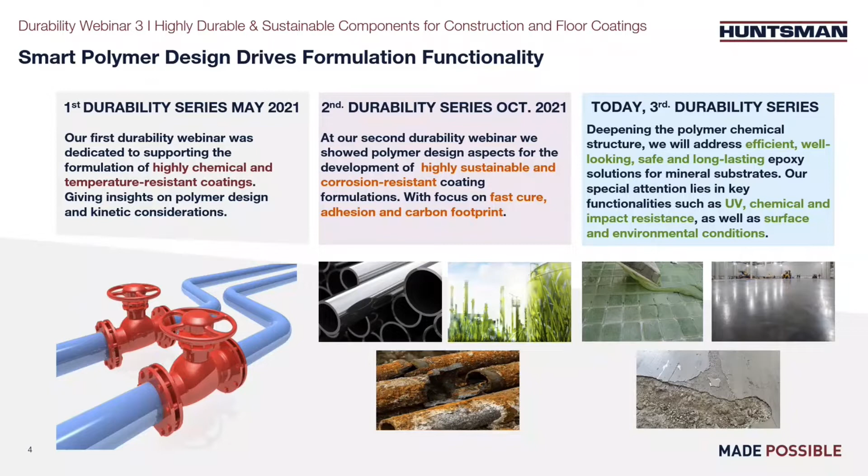Today, and following the specificities of the polymer chemical structure, we will address key infrastructure challenges like low emissions, UV light, chemical and impact resistance for a variety of surface and environmental conditions. What are the topics that we will be touching today? We will start with the general benefits and applications of the epoxy systems, followed by high-level science fundamentals on key features such as viscosity, crystallization, UV resistance, and hardness.

We will continue showing our European Selector Guide for construction and flooring formulations, and this as an introduction to showcase polymer design features of our epoxy systems to enable efficient infrastructure projects and long-lasting mineral structures. We will conclude with a final selection of sustainable component solutions to enhance key formulation needs for construction and flooring applications. Let's get started with the chemical backbone of epoxy systems to explain the benefits and the broad range of construction applications in which they can be used.

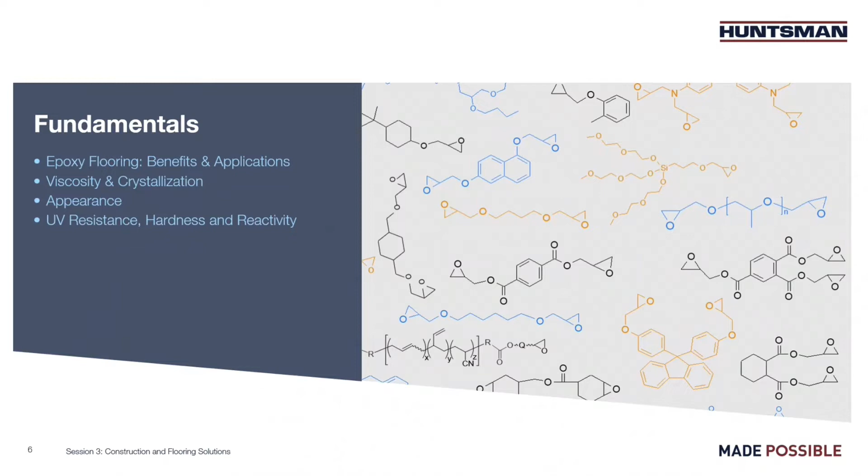Firstly, what is an epoxy floor and why do we talk about enhanced performance of epoxy floors compared to concrete floors? You can see here on the top of the slide a selection of key properties that are improved by using epoxy systems for flooring, which Alex will be backing up in a minute with empirical evidence. An epoxy floor generally consists of multiple layers of epoxy with a depth of at least 2 millimeters that creates a highly resistant, glossy and smooth surface that can be built in a variety of colors.

When applying epoxy technology to flooring solutions, its polymeric structure creates a remarkably strong bond that is able to withstand high temperatures, humidity, and abrasion exposure, providing 10 times more impact resistance than a concrete floor. That is why industrial sites, warehouses, and commercial buildings with heavy traffic rely on epoxy floors to ensure the durability of their assets and keep clean and safe conditions for workers, equipment, and inventory.

Epoxy viscosity properties also enable more efficient and easy to apply formulations. And additionally, its flexibility enhances crack bridging resistance, which is required to adequately protect the substrate and accommodate movement, vibration, and impacts without cracking. So overall, epoxy systems provide superior, long-lasting performance for mineral structures and require little or no major maintenance over the years.

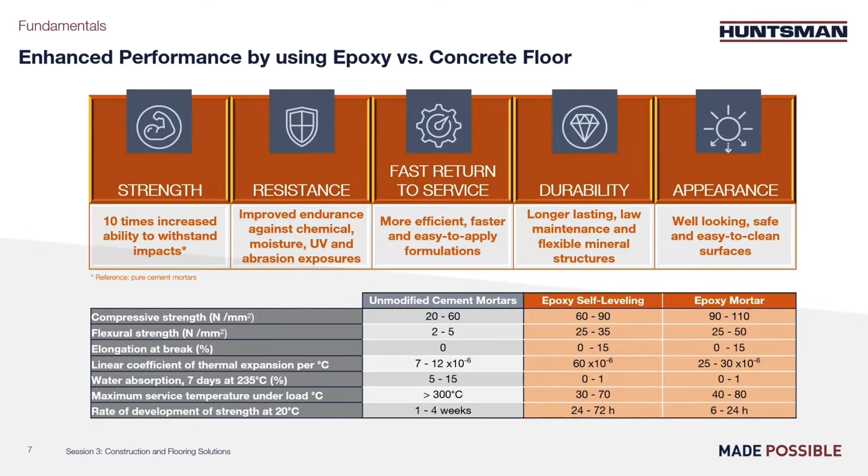If the strength is improved, it is due to high elongation at break of organic material versus mineral. Another advantage is the low water absorption of an epoxy and the faster cure of this thermoset material. Those advantages result in a better chemical resistance and a faster return to service.

Let's start with the application flooring. In an epoxy floor, you need a hardener, often based on polyamine, and a resin. Generally, filler, pigment, and additive are also added. The formulated epoxy floor is tailor-made for the application, so it can be a primer, a self-leveling, a mortar, or a top coat. Specific properties, depending on the application and on the process considered, lead to different choices in the hardener and in the resin.

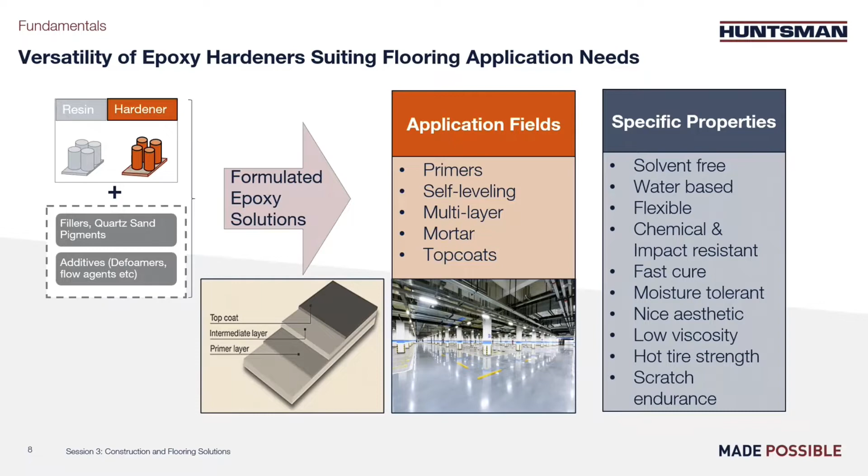For instance, waterborne solutions require specific choice of components. Also, when good surface appearance is needed under tough conditions like low temperature, high humidity, specific hardeners should be used. It is generally the hardener which is key to the final properties, whether they are appearance, kinetics, or chemical resistance.

Systems for other types of application are not so different than flooring. The concept is the same. You need a hardener, resin, filler, and additive. The process needs to be chosen, waterborne or not, for example. You might be needing a fast cure for repair or a good crack resistance, for example.

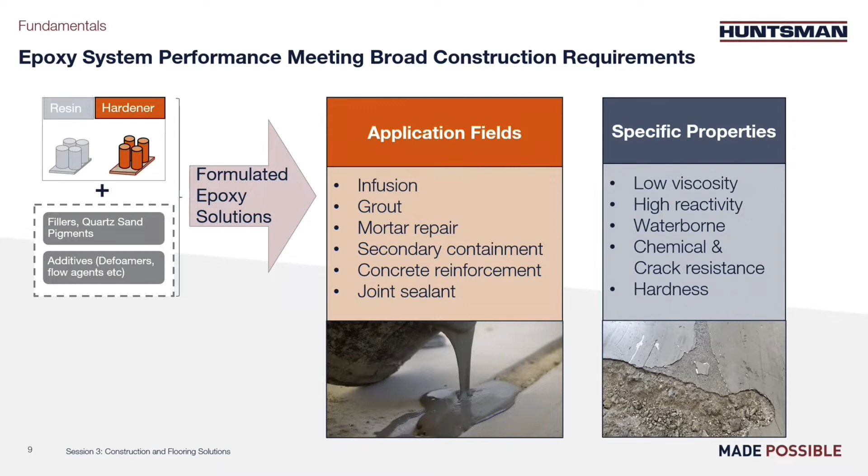Often, in this type of application, the system is designed to achieve a very low viscosity, enabling the addition of large quantities of filler and higher strength. Many possibilities of hardener exist, and generally the challenge is to deal with fast cure, viscosity, acceptable pot life, and no VOC.

So viscosity. Viscosity is a key parameter for most of the construction applications. To deal with viscosity, we have different resins to choose from, depending on the final properties you are aiming for. You can see on the graph, the viscosity varies quite a bit at low temperature, depending on the way the resins are designed. So low viscosity is often important to achieve a good penetration into the mineral substrate, which is slightly porous. It helps for good adhesion onto the substrate.

And differences in viscosity are important also when you want to add more filler. Basically, it's easier to add filler to a low viscosity organic system, and then it's possible to deal with the formulation at low temperature.

Another important parameter is the crystallization resistance. It is very difficult to reverse crystallization of chemicals. Actually, it's kind of impossible if you are on site, because if you want to melt a crystal, you generally need to reach 70 degrees C while you are mixing the resin. So we have designed specific resins like Araldite GY783 and/or GY793 in a way to avoid this crystallization. Those two resins are generally fitting the self-leveling and top coat applications.

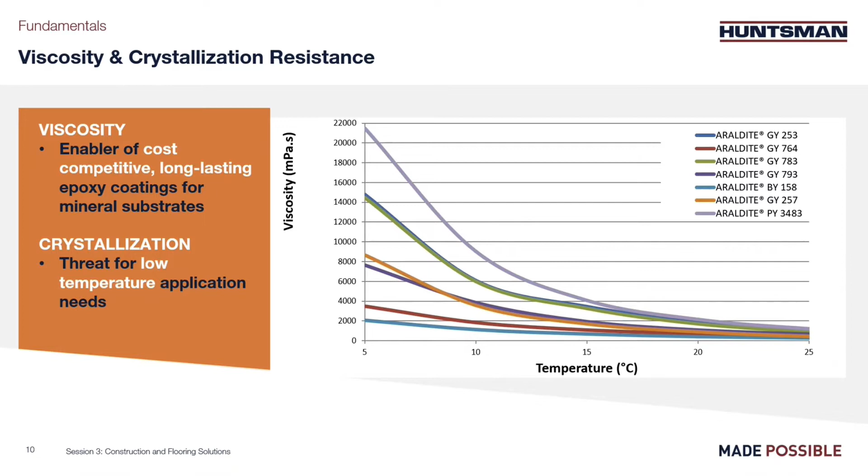Okay, so we have explained how you can basically design an epoxy system using resin and hardener. And on the scheme, we present what is happening once you blend the epoxy and the hardener. So on the left, you can see the mix in the pot. You then have the open time, which depends on the quantity of product and the temperature. The application on the substrate is then represented, and the goal is to cure as fast as possible. On the top, you see an ideal system, fast to cure.

On the lower part of the scheme, you can see when the surface is in contact with carbon dioxide and humidity for a long time. The amine remains at the surface, and it leads to surface defects, which can be exudation of the amine or carbamation. The chemical scheme in the lower part of the slide explains what carbamation is. It's a reaction of CO2, carbon dioxide, with an amine in presence of humidity, and this reaction is not reversible. So after cure, you have the case with no surface defect still on the top.

And when you perform a water spot test, meaning leaving a drop of water for 1 hour and removing it, there is no trace visible afterwards.

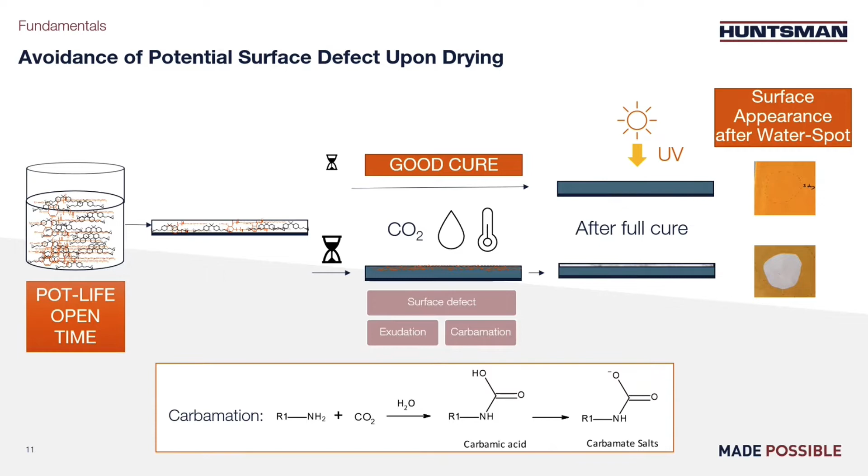When you are in the second case of a bad cure, in the lower part, you see white traces which will remain for good. Different phenomena can be visible: white spots in case of water droplets, blushing of the whole surface in case of high humidity, or sticky, greasy surface in case of exudation. Basically, many defects are possible, which can be amplified at low temperature due to longer cure or unexpected high humidity. Hence, the choice of hardener is critical.

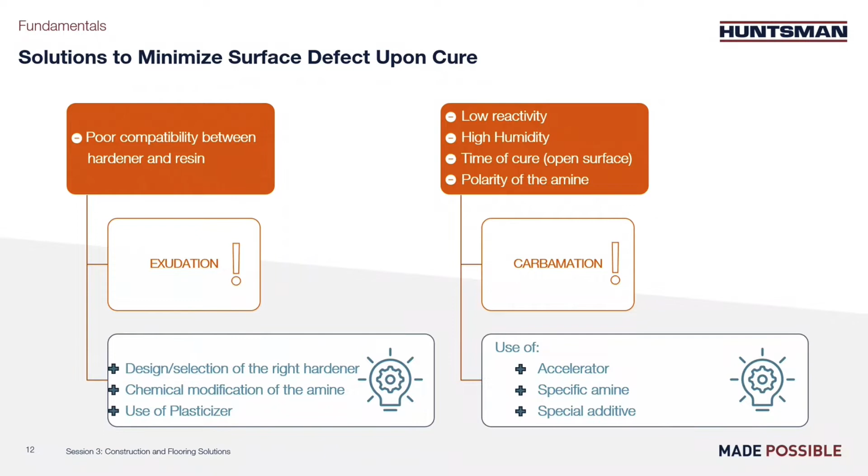Low reactivity, high humidity, and polarity of the amine can often lead to carbamation. To circumvent this phenomenon, we use accelerators, special additives, and specific amines. We will discuss this further in the presentation using appearance tests, specific hardeners, and one additive.

Now let's look at the final cured material. Once the epoxy is cured, you get a surface which is subject to UV light. It is clearly more pronounced outdoor, but indoor it's also possible since we generally have windows around us. Aromatic rings, represented as small hexagons, absorb UV light at 254 nanometers. This light energy is dissipated in the material and leads to degradation, resulting in yellowing and, in extreme cases, damage to the surface.

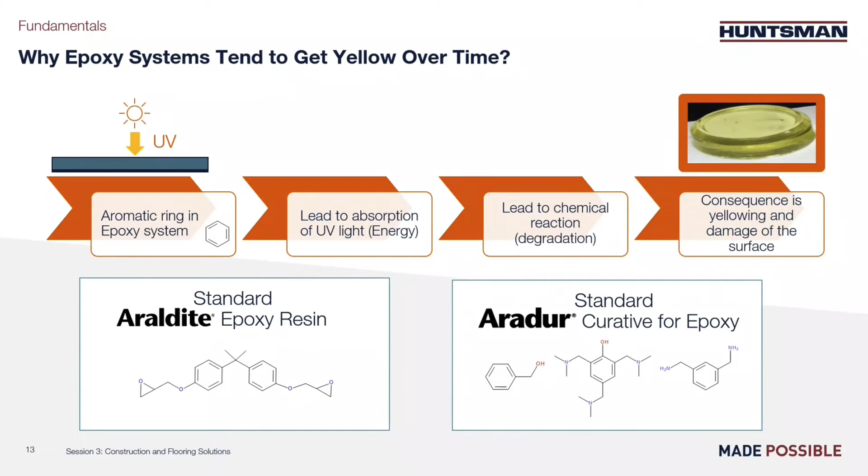Below, we have represented the chemical structure of a standard epoxy resin, and you can see the presence of those aromatic rings. On the right side are some components often present in hardener, and here again you can see the presence of those aromatic rings absorbing UV.

There is a way to reduce UV absorption by playing with the epoxy molecule or amine used to design an epoxy matrix. We have drawn different molecules, and the two left columns are aliphatic or cycloaliphatic molecules, which in principle do not absorb UV. Generally, those molecules lead to lower viscosity, hardness, and reactivity. If lower viscosity is an advantage, lower hardness and reactivity are really a problem.

To go around that, we can play with the functionality of the components, meaning how many reactive sites per molecule. In the three columns, from top to bottom, there is an increase in this functionality. It leads to higher viscosity and reactivity. It also leads to better hardness and better chemical resistance because the resulting cured material has higher cross-linking density.

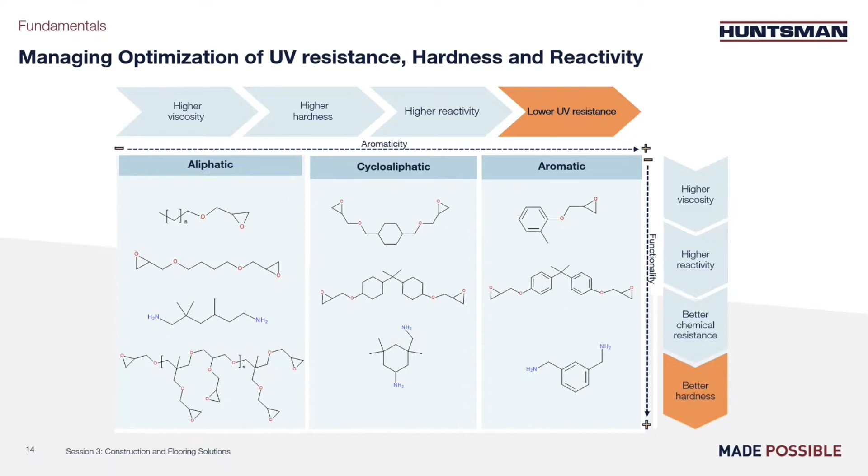So in principle, it is possible to get a fully aliphatic or cycloaliphatic system, but you need to really take care to get a good combination, one that cures well and results in a material that is hard enough. We will propose combinations which fulfill those needs afterward.

Thank you, Alex. Okay, let's leave behind for a minute molecular epoxy features and focus on less scientific information. As an introduction to all the data that Alex will share in a minute on our specialty epoxy building blocks, I would like to present briefly the selector guide content that we have gathered specifically for construction and flooring formulations.

The table you see here is meant to be a core portfolio matrix, by product category on the left and key features on the top, addressing application needs to provide you at a glance with a possible selection of material combinations suiting your key formulation needs.

We have streamlined even more this range with a summary that I will share at the end of the presentation, outlining our newest sustainable developments, marked here in blue, like the CMR-free Araldite DY-31 multifunctional reactive diluent, the salicylic-free hardeners Aracool 3077-1 and Aradur 2965-1, and the waterborne accelerator Aracool WB007.

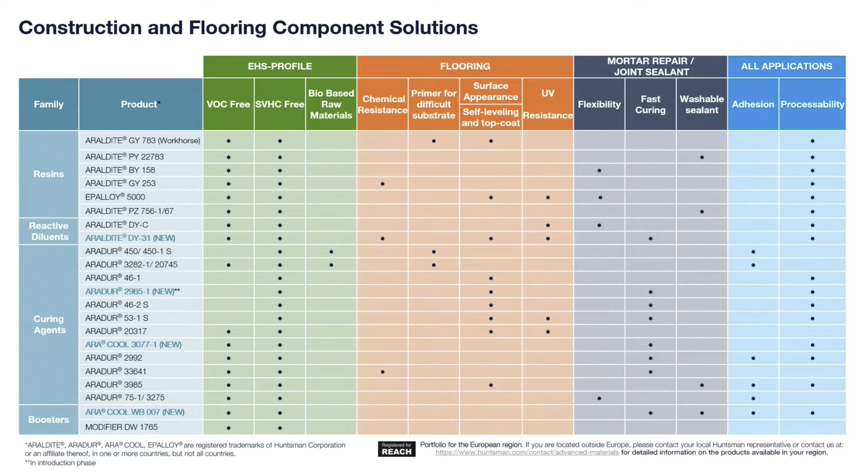At this point, Alex will move on with key properties of the selected innovative products from the core range I have just presented, which are designed to lower the VOC output and boost the efficiency of your formulations for construction and flooring projects. So please, Alex, go ahead.

Thank you. So on the efficiency subject, we wanted to start with waterborne. Generally speaking, epoxy chemistry is compatible with water. In this slide, we present a specific product, Aradur 3985. The product is 55% solid in water, solubilized in water, and can be used with 100% solid resin.

Unlike what could be expected, it is possible to use it in a thick layer application. The water will be able to get out, and the mortar or the self-leveling will be porous or permeable, let's say.

Unlike most of the other waterborne hardeners, this one allows a visible end of pot life. It means you will see gel formation. For most other waterborne systems, you will not be able to see that, and the risk is to apply even when the pot life is over.

On the left side, there is an example of a thick layer mortar, about 1 centimeter thickness, and you can see the simple formulation. On one part, the hardener is formulated with water and a defoamer, and the second part is a pure Araldite PY304, formulated with a blend of different particle size quartz. It helps to ensure good packing and the good mechanical properties of the mortar.

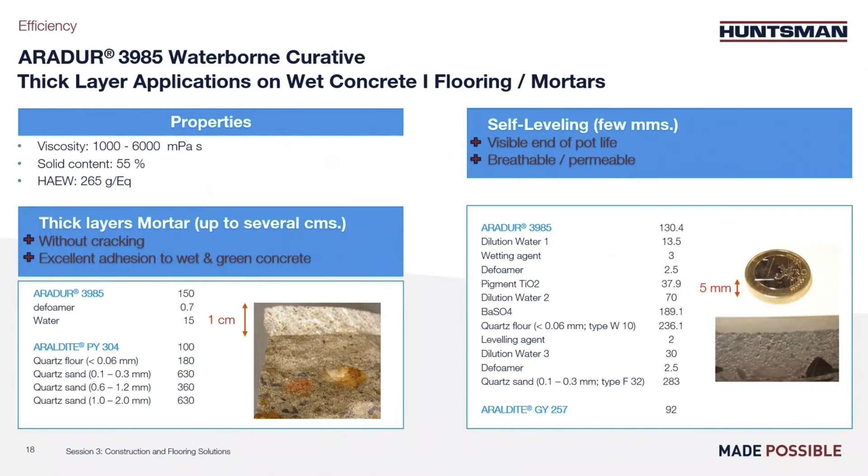Still on the waterborne subject, generally waterborne systems are not so fast to cure, and often there is a demand to speed it up. But unlike traditional systems, standard accelerators do not work very well, as those have to be added as a third part. So this new Aracool waterborne 007...

...is water soluble, so it's mixable with any waterborne hardener. It maintains, on top of the acceleration, a good flexibility, and it has a good EHS profile.

When you look at the graph on the right, you can see on the left side the pure Aradur 3986, Araldite PZ 756-1 system. Going in the right direction on the graph, we substituted Aradur 3986 by the Aracool waterborne 007.

They have similar H active equivalent weight, so you can do that. You can see with the continuous line the drying time at 23 degrees in orange or at 10 degrees in blue. The dashed line is the visible end of pot life.

The system Aradur 3986 PZ756-1 has no visible end of pot life. And you can see that with 5% substitution of the hardener, it already allows a visible end of pot life, which is really positive for a waterborne system because it avoids the mistake of the applicator.

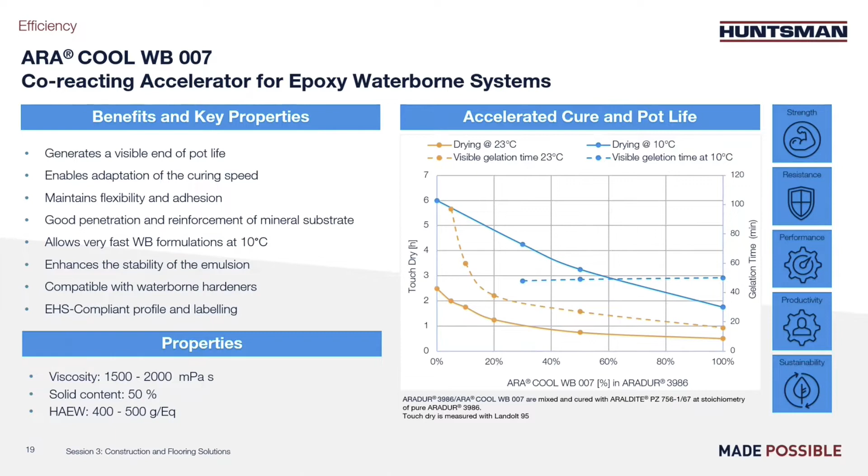At room temperature, the drying time can be divided by 5 when using 100%, but the pot life duration is also reduced tremendously, to about 20 minutes when 100% Aracool is used. So, as usual, an accelerator reduces the drying time but also reduces the pot life, and the optimization needs to be found depending on the process and the application type.

So here we have an example of how to use this new Aracool waterborne 007 as a drainable mortar. We did a simple formulation presented here: basically the standard waterborne resin Araldite PZ 756-1/67, the pure Aracool waterborne 007, and some grits.

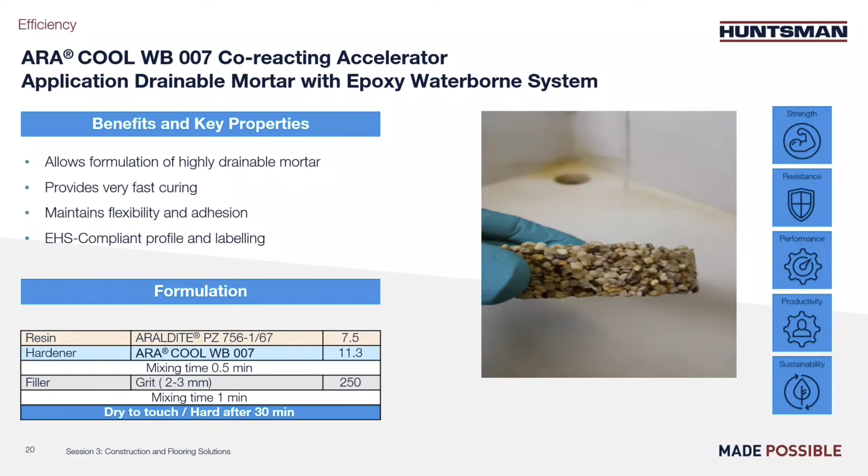The mix was done quickly, and after 30 minutes, the product was hard, with still a good level of flexibility, helping the adhesion between the small stones. Due to the large porosity, water is going through, as I'm trying to show you now.

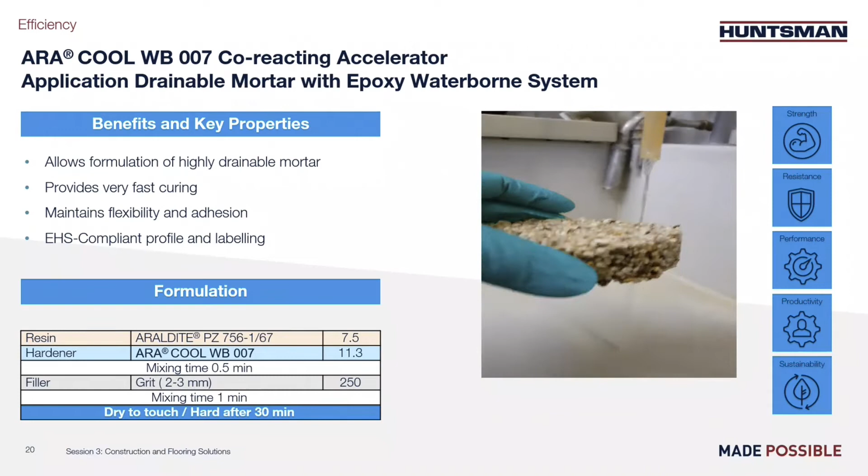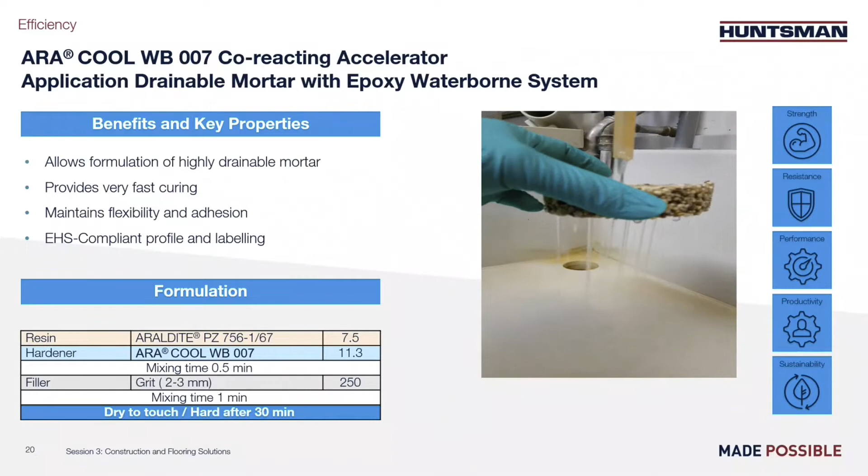Here is another example of use of this new accelerator, in this case with cement. The principle is epoxy cement concrete, and basically cement needs water to react. By using waterborne epoxy, we can introduce in the cement some organic epoxy thermoset, which brings additional properties to cement, like strength. The Aracool waterborne 007 also brings some acceleration to fasten the curing.

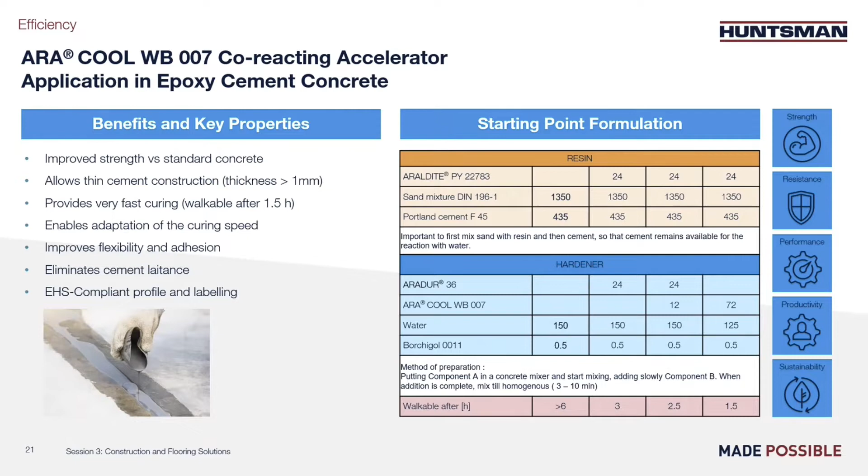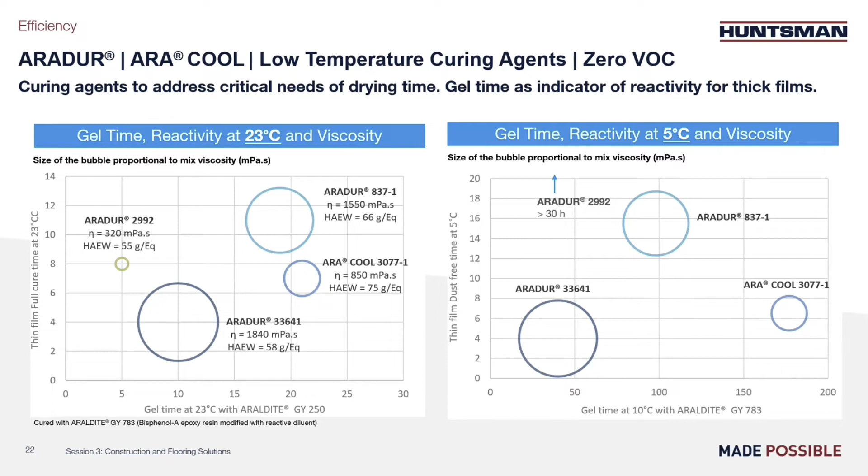It is low in viscosity, has a relatively long pot life, and dries pretty well at 5 and 23 degrees. It is a very good choice, for instance, for a zero VOC repair mortar system, as I present on this slide. So here we focus on mortar.

Generally, the hardener needs to be low viscosity, enabling a very high filler loading, about 90%. Having this loading allows high strength and high hardness, as well as good chemical resistance because of the organic part. For fast repair, a fast cure hardener is generally preferred, and here the Aracool 3077-1 in combination with standard low viscosity Araldite GY783.

This is our example. You can see on the right the simple formulation with different particle size sands, enabling a good packing of the filler. So generally, for mortar, the goal is to deal well with viscosity, and for repair, with fast reaction. Lots of different hardeners can be used for this type of application. Why lots? Because here the appearance is less of an issue than with self-leveling application, as we are going to see on the next slide.

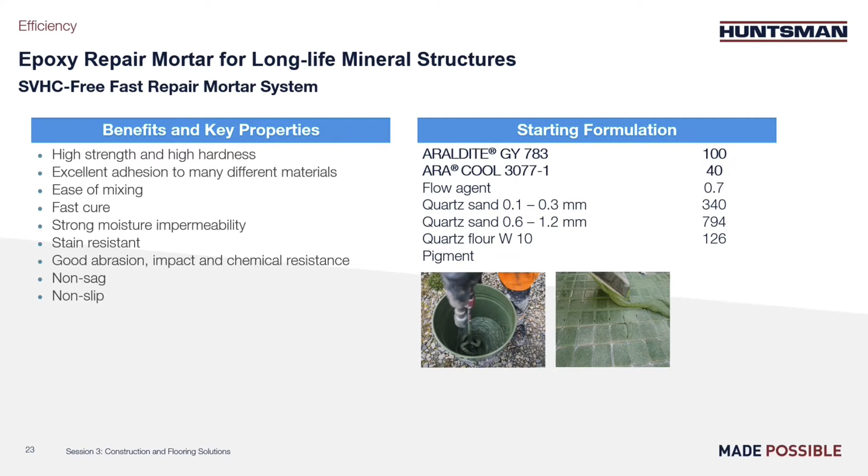On this slide and the next one, we want to focus on 100% solid epoxy self-leveling hardener, and potentially also for top coat or thin coat. Those hardeners are designed with a view toward very good appearance, and generally speaking, the goal is to get a certain reactivity, either in cure and in gel time.

They vary also in their viscosity, which enables, when very low, adding more filler and still having very good flow, ensuring leveling. As you know, for these applications, final appearance is key, and the hardeners are made in a certain way to achieve good appearance.

Over the years, many accelerators used in those hardeners became substances of very high concern, and we have been always very proactive to anticipate those changes. You can see the -1 or the -2, which means we either removed phenol, bisphenol A, nonylphenol phenol, and more recently, salicylic acid.

HAEW mentioned relates to the mix ratio. Hence, if HAEW is 95 grams per equivalent, you need 50 parts of hardener for 100 parts of standard resin by weight.

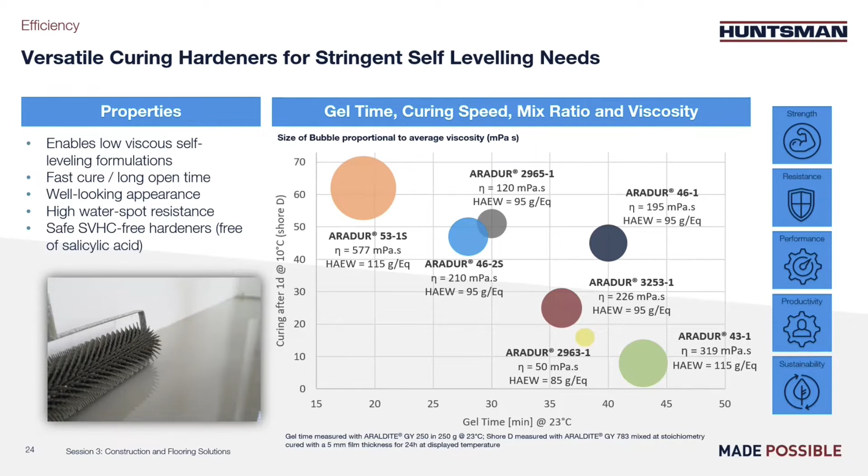We can clearly see that curing development is linked with the gel time, so depending on the needs, the right compromise must be found. Another parameter in this range of products is water spot resistance and appearance, and we have tested those parameters on the next slide.

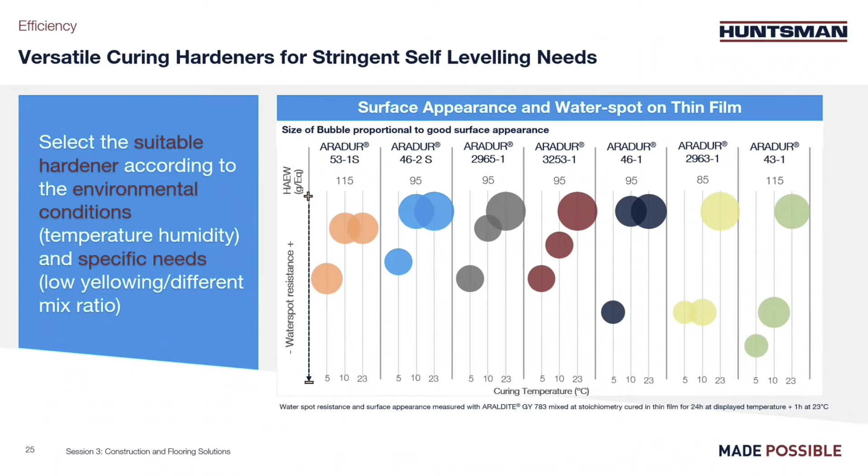Here, we wanted to speak about this product because one easy way to improve appearance or water spot resistance is to use an additive, and this additive is a modifier DW1765. It helps to reduce surface defects. It also helps for intercoat adhesion when an additional layer is added, and for scratch resistance eventually.

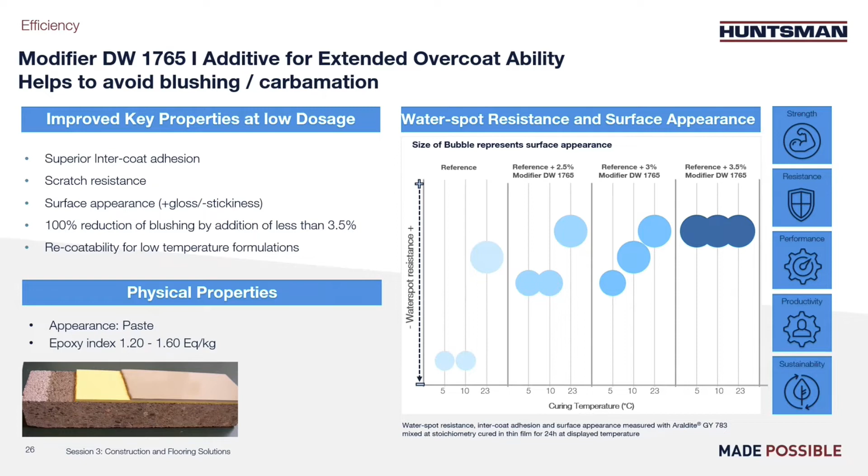On the graph, you can see the effect on a very bad reference with bad water spot resistance at 5, 10, and 23 degrees. Adding 2.5% reduces considerably the surface defect, and with 3.5%, the surface is kind of perfect, even at 5 degrees. So the modifier 1765, I would say it's a good way to improve a formulation without changing it—without changing hardener and resin, it's more like a drop-in. That's the advantage.

Thank you, Alex. Let's give Alex a well-deserved break and allow me to open up our second part of this presentation. So far, in the previous slides, Alex has showcased how to empower faster return to service through more efficient and easy to apply formulations. In the upcoming second part, he will focus on longevity as the ultimate enabler of sustainability. You will learn how our component solutions help to ensure that construction structures withstand external aggressions without deteriorating for a longer time.

So, durability. No surprise that primer comes first, so I'm going to speak about primer a bit. Generally, primer is here to reinforce the surface of concrete and also to ensure the better adhesion of the next layer. In this part, we focus on primer for marginally or freshly prepared surfaces with no need for surface pretreatment. This range of products is designed to provide outstanding adhesion and good reinforcement of the concrete. Those products are made in a way that they even cure well underwater.

And this ability to cure underwater enables application on green or fresh concrete. Basically, there's no need to wait for the full cure of the concrete. It is possible to apply the primer as soon as you can work on the new concrete. It also allows you to seal the concrete so it can cure without water evaporation, which helps for the quality of the concrete afterwards.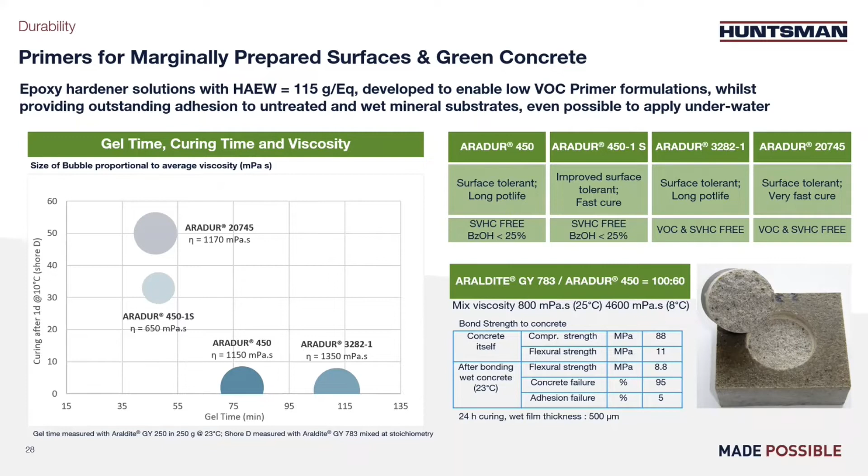Here, another application called crack bridging layer. So often when people think about epoxy, they assume it will be very hard, but actually it does not always have to be that way. So the few hardeners presented here have been designed in view of high elongation at break. With these systems, it is then possible to reach up to 300% elongation at break, a bit like a rubber.

Application can be a flexible layer to absorb movement from the ground. And in case of crack, the flexible layer can absorb the crack or the energy of the crack to avoid the propagation to the surface. You can see an example on the picture where the top layer is not damaged while the under part is completely cracked. So more generally, you can create with those products waterproof membranes or flexibilize systems which are a bit too rigid.

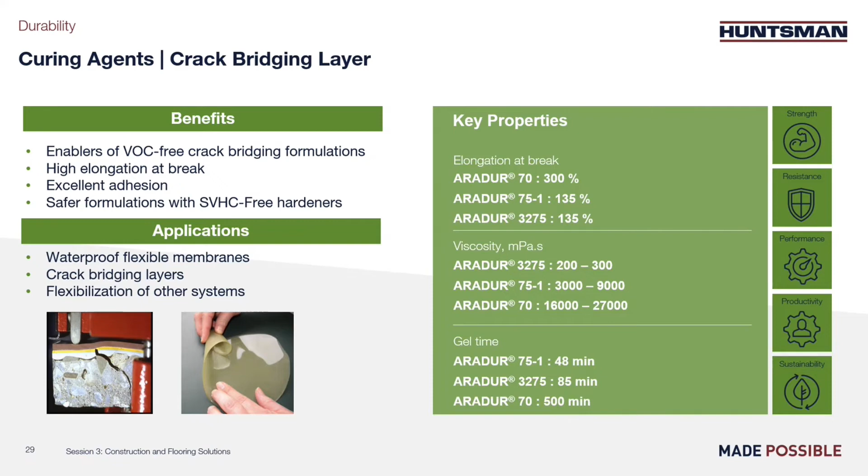Here on the graph, you can see the three products discussed before. On the x-axis, you can see the gel time, and on the y-axis, the elongation at break. The size of the bubble is proportional to the viscosity. If Aradur 70 gives up to 300% elongation, the viscosity is high and the reactivity extremely low. So the two other products, Aradur 75-1 and Aradur 3275, are still giving a good elongation at break around 130%, while reactivity is more in an acceptable range.

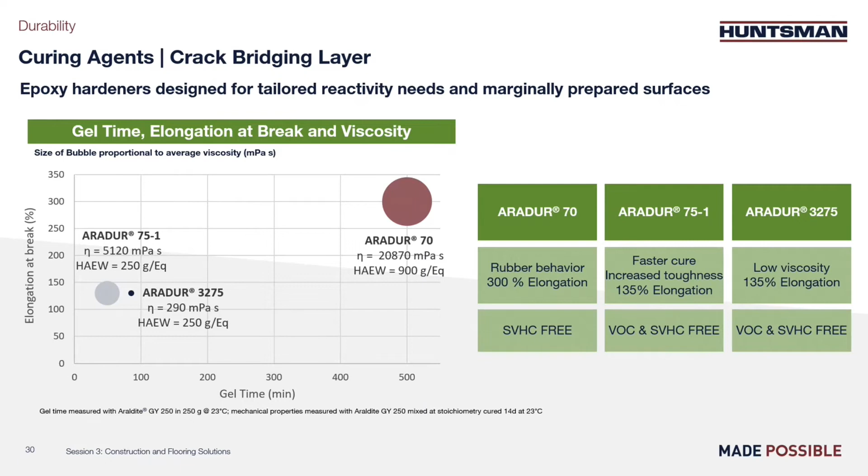Aradur 3275 is also very low in viscosity, but what we observe is that toughness is better with Aradur 75-1. So if you want to put filler, of course, Aradur 3275 would be better, but for toughness, 75-1 is more interesting, I believe.

Low yellowing. Here, as we've shown before in the first part of the presentation, the epoxy systems are subject to UV exposure, which often leads to yellowing. As discussed earlier, it's possible to minimize the yellowing when you choose the right building block, not aromatic, but it's also important to tune the other parameters, reactivity, and so on.

We find two different applications for low yellowing. The first one would be with thin film application, and it is then critical to get a good reactivity, otherwise you would have a dreadful surface. And then there is no point to be low yellowing if it's a bad surface.

A second application can be like the river table on the second picture on the right, where you have a very thick layer casting up to 15 centimeters, for instance. In that case, it's critical to limit the heat development, also called exotherm, when the epoxy cures. Hence, you need a very low reactive system.

And why do we want to avoid exotherm? It's also because exotherm leads immediately to a color development in the epoxy system. So it's also important for this thick layer application to avoid exudation, because that would not be nice either.

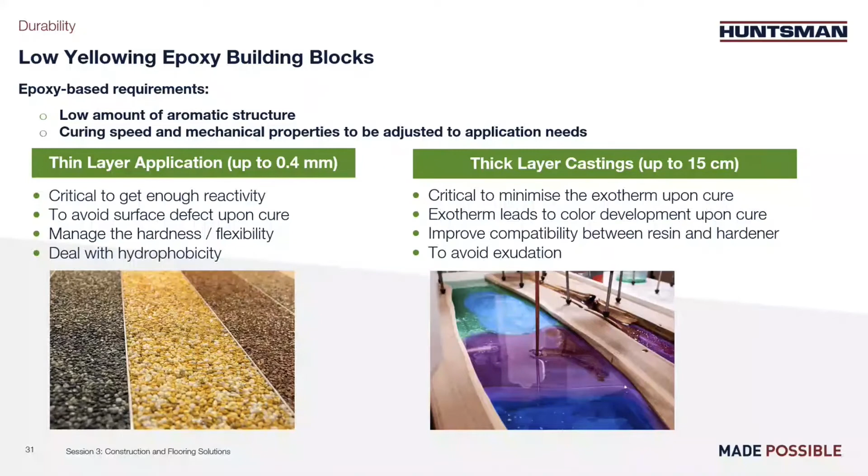So in this slide, we have gathered the building blocks which are relevant for low yellowing application. On the left side, the curatives, and on the right side, the resins. Viscosity is proportional to the bubble size, and color intensity to the UV absorbance. So in effect, the deep green bubbles are standard references, which are not especially low yellowing. On the x-axis, we have put the reactivity, and on the y-axis, the impact on hardness after cure.

For instance, if the combination Araldite DY-C with Aradur 53-1S will cure okay and be relatively low yellowing, the product will be soft, which maybe is not so great. If the combination Epalloy 5000 with XB 3403 would be low yellowing, for a thin film application the appearance would not be good because reactivity would be too slow.

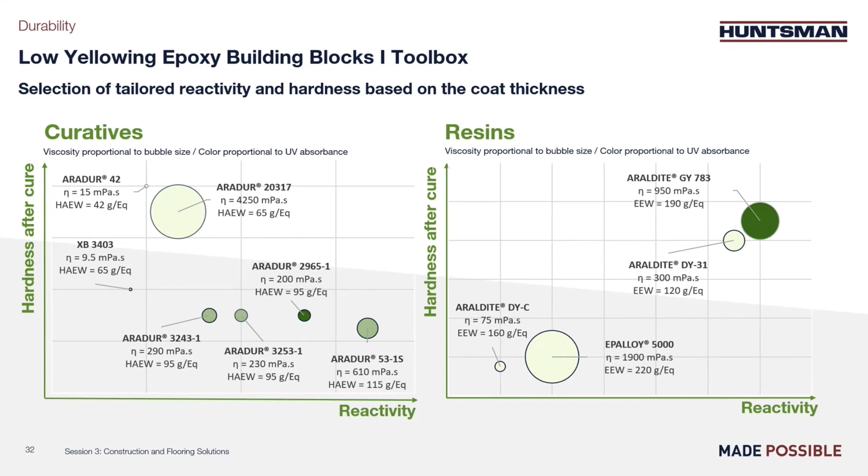So here, a good combination for good hardness, low viscosity, and low yellowing could be Aradur 20317 with Araldite DY31. And on this slide now, we show the result of different systems based on different building blocks. In general, the tests were done in view of thin film application.

So on the left graph, you can see the yellowing index, and on the right graph, the gloss evolution versus time in QUV chamber. This QUV chamber is an accelerated test. And if we compare with results behind the window, they follow the same trend. And generally, we have seen that 15 days in QUV chamber is about equivalent to 1 year behind the window.

In green, we have the reference system, Araldite GY 783 with Aradur 2965-1. After 2 weeks, the system is yellow, as you can see. And you can also see the loss of gloss. It means the surface is damaged and there is potentially extraction of the plasticizer, leading to a matte effect.

When replacing the resin GY 783, which is aromatic, by Epalloy 5000, which is not aromatic, and keeping the same hardener, we can see that the yellowing is less pronounced. Nevertheless, after some time, it also becomes yellow because of the hardener. So, as expected, the best system is when you use Aradur 20317 with Araldite DY31.

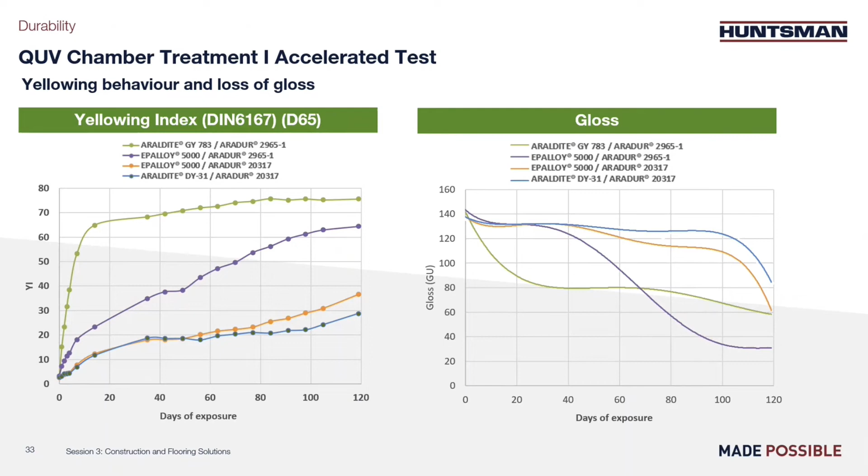So as a conclusion of this part, I would say that epoxy systems can be relatively low yellowing. Maybe not no yellowing, but low yellowing is possible. Thank you. I think I hand over to Sarah.

Thank you, Alex. So, as anticipated in the introductory part, when showing our selector guide of core products, I would like to finish today's presentation with a streamlined overview of our selection of key sustainable epoxy components. Starting with the SVHC-free or zero VOC hardeners on the left-hand side, all of them are designed to address a broad range of specific and critical application conditions.

On the right side, we showcase our two newest eco-conscious innovations, our CMR-free multifunctional reactive diluent Araldite DY31 and our Ara Cool WB 007 accelerator for waterborne systems. Finally, although not new, not less relevant, our modifier DW1765 additive, relevant for its ability to boost impermeability and scratch resistance.

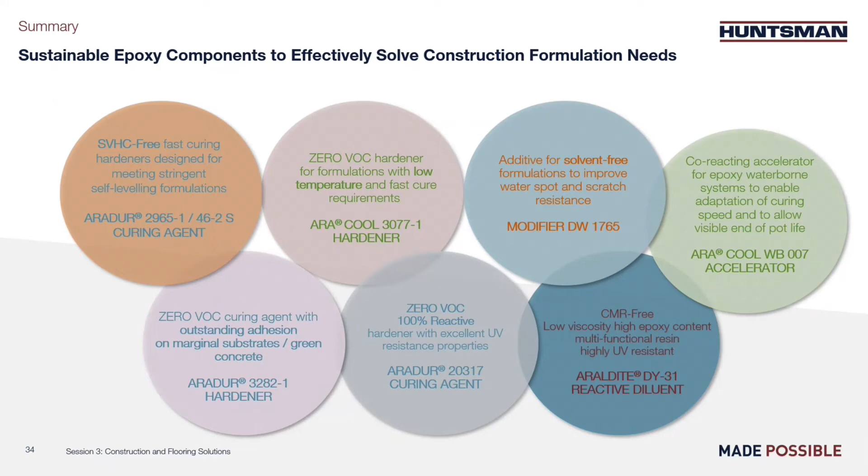And with this, we conclude our presentation of today and would like to open up for your questions. If you allow me, I would like to start down to top, for practical reasons, just so we will get to all of them, hopefully.

So we have here the latest one, I think, from Venkatesh: whether we have a similar modifier for a non-waterborne system to improve the carbamation resistance. Would you be able, Alex, to address this question? Yeah, sure. But actually, I guess the question was about the modifier 1765. I think so, yeah. I don't think it would be the waterborne accelerator.

So this modifier is actually for solvent-free and not waterborne systems. And so in principle, it does really improve the carbamation resistance. So I don't have a similar modifier for waterborne like the DW1765, but it works for solvent-free solutions. Very well, yeah.

Please, Venkatesh, in case we misunderstood your question or you would like additional clarification, don't hesitate to enter your question or your clarification again. So the next one, I will follow again the logic and start with the latest one that we have got from Hisham. What is the difference between exudation and blushing? Alex.